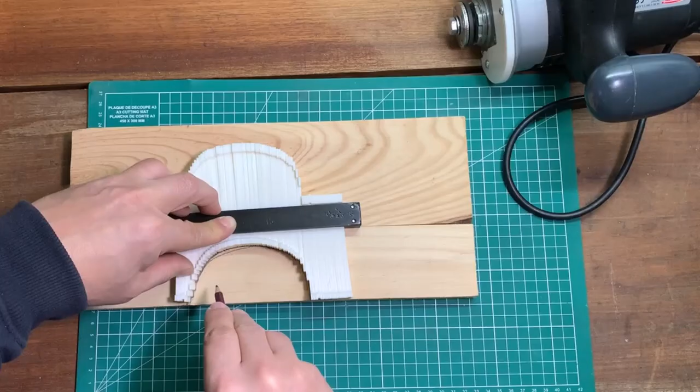Welcome to this second episode of our contour gauge creation with xDesign. In the first episode, we created the main parts of this contour gauge: two housing parts to hold blades, the blades themselves, and a clamping system to keep blades in position. Let's finish up this project by adding standard hardware, creating a knob, and making the assembly more colorful. If you haven't watched the first episode yet, I strongly recommend doing so before continuing.

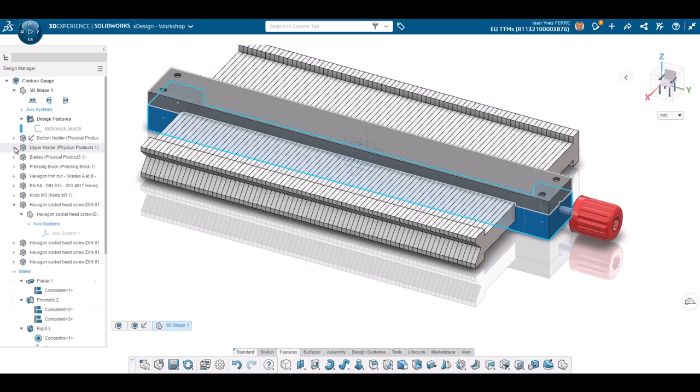I would like to use standard hardware, and for that I use 3D Experience Part Supply. This service is provided at no additional cost with any license of 3D Experience products. You can add a widget from the compass and get thousands of standard parts.

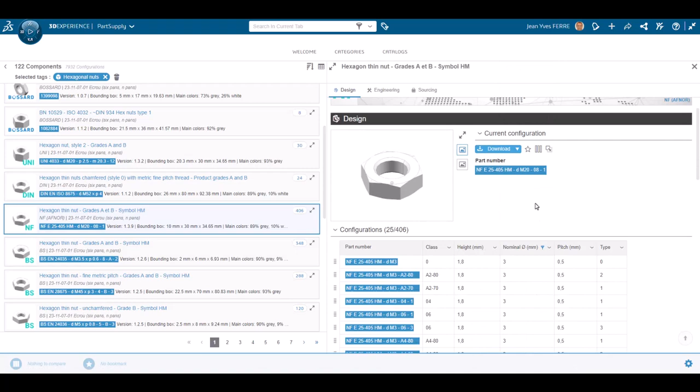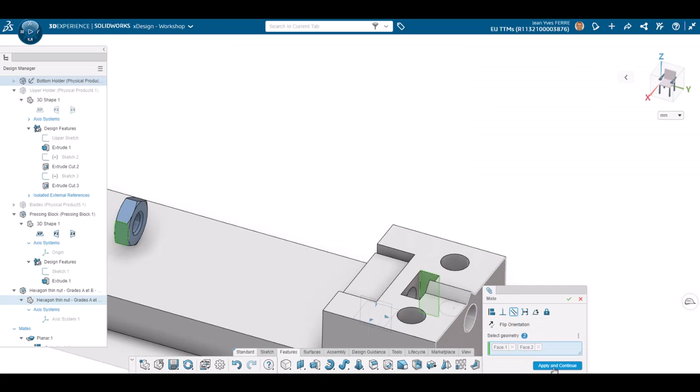For my project, I need a bolt and a nut. Let's start with the nut. Once I choose the type and dimensions, I can drag and drop 3D parts directly into my assembly. Very convenient. Of course, this is exactly like a part I built, so I can add mates and position it accurately. See how I solved the mating error with a parallel mate instead of a coincident one. Last positioning is made with a simple face-to-face mate.

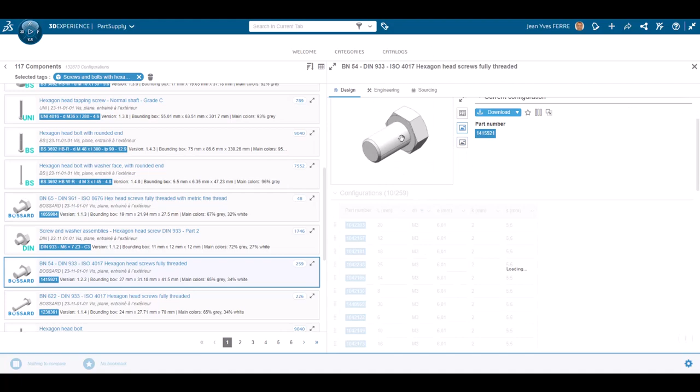Let's do that also for the bolt. I go back in the Part Supply widget. I choose bolts, category, dimension, and once the part is the right one, don't forget to click on the configuration. I can drag and drop it in my assembly. Don't forget to click insert, or you will open the bolt in its own window and close your assembly.

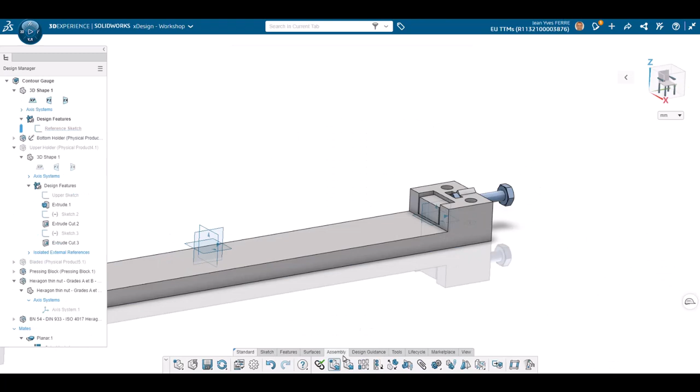Of course, you can also add mates to the bolt. They are both in place now. I will create a knob on the bolt head so I don't need a tool to clamp the blades.

To do that, I create a new component in my assembly with a simple click and start on the inside face of the bolt head. I will create some geometry around the bolt head and make sure there is no clearance so the knob stays in place. I project the bolt head and create a cylinder around it.

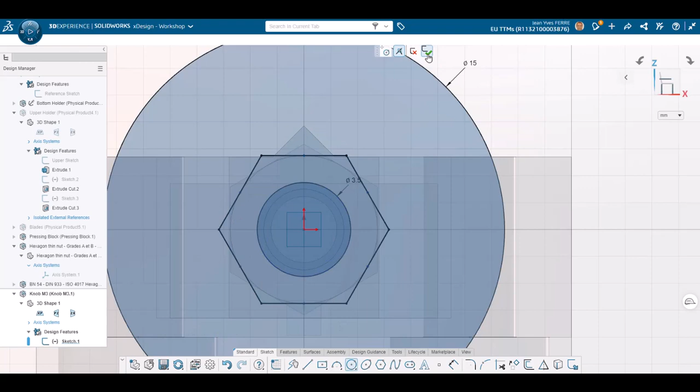I clean up the sketch to its selection and use this sketch for two extrusions. In one direction I add all contours for the bolt thread, and in the other direction only the outside contour for the bolt head. Don't forget the hole contour in the middle, or you will get a blind hole and won't be able to insert the bolt. You see that just selecting contours quickly gives the result you need.

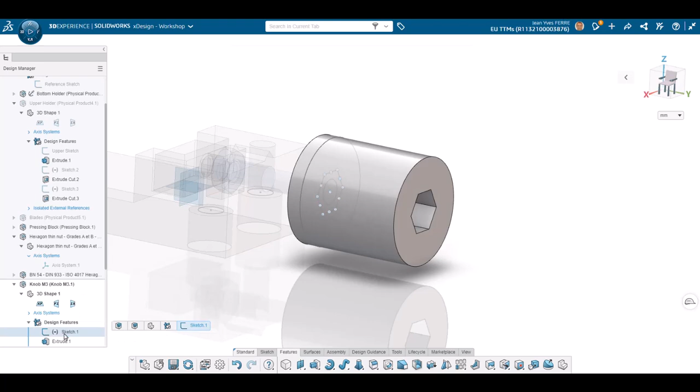I hide the sketch for more clarity. I would like to add grooves on the knob to increase grip when I clamp the blades, because I may need to put some effort there.

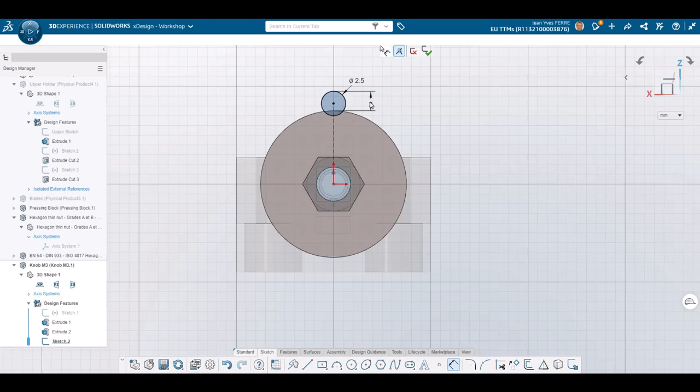To do that, I cut the knob head with a small cylinder using a cut extrude feature that will stop before the end, for style.

And I add fillets to remove sharp edges. I use the preview to guess the fillet dimension.

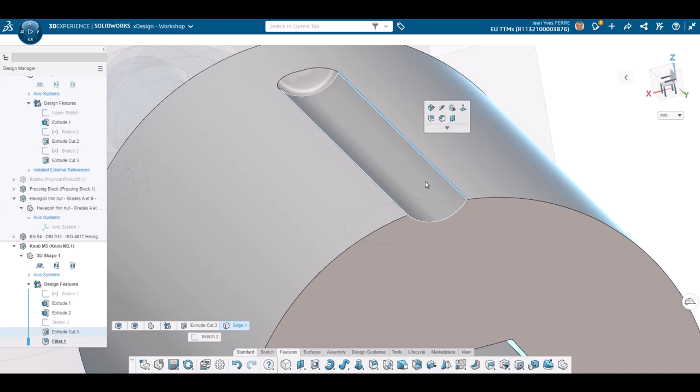Then I create a pattern with even distribution of the cut, and I also add fillets to this pattern. I just say I want to make the circular pattern 360 degrees, and xDesign shows how they are distributed. I increase the number so it looks nice.

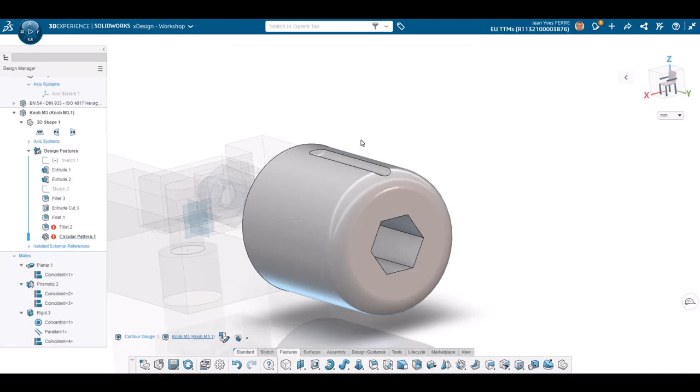I would like to round outside edges with a big fillet, but for that I go back in part history with this slider, so I can put the large fillet before the grooves. Doing so, there is an error because the edge I added for the fillet has disappeared. I just reassign the edge and it works fine.

I like to change the knob color, so I select color on the geometrical set. This is where you can change colors easily, and now the knob is red.

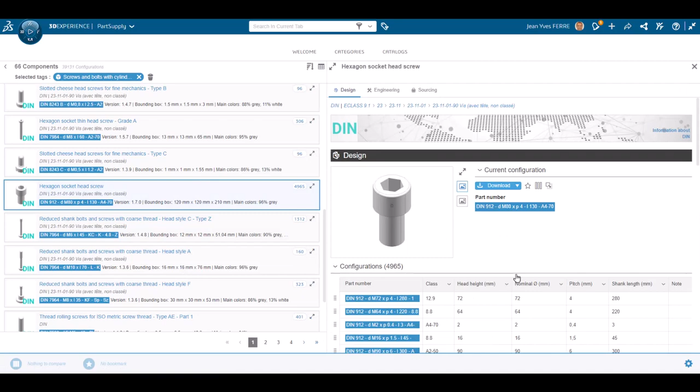To finish the assembly, I need bolts to keep the housing parts in place, so I go back in the Part Supply widget to find M3 bolts with the standard length that fits in my assembly. Again, I select category, drill down to M3 screw with hexagon socket head, and choose a length. I activate the configuration, don't forget, and I drag and drop it in my assembly.

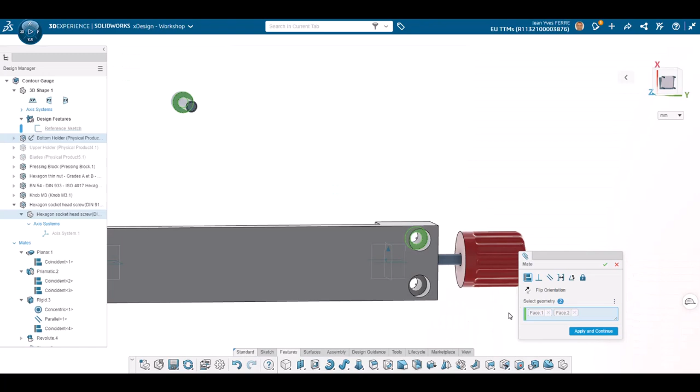Again, don't forget to click on insert, not on open. Mating is fun too. I select entities and choose directions. See how the bolt turns to match the right orientation. I finish with a concentric mate.

I copy the bolt, holding the Ctrl key while dragging the component I want to copy with the left mouse button, and I do that three times. Then I add concentric and coincident mates to position the last three bolts.

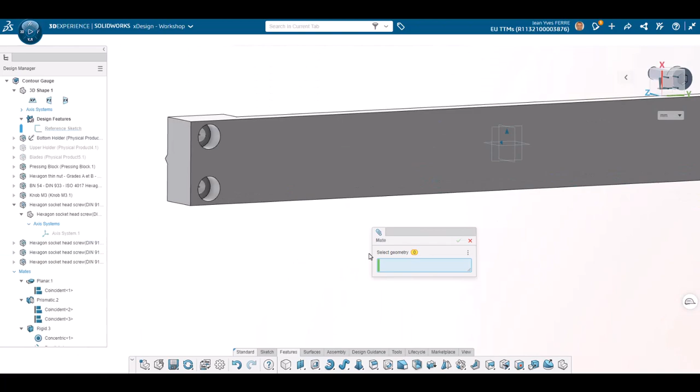Bolts are now mated in my assembly, so I show all the parts. I change the housing color to black, remember, with the geometrical set, whose default name is Design Features.

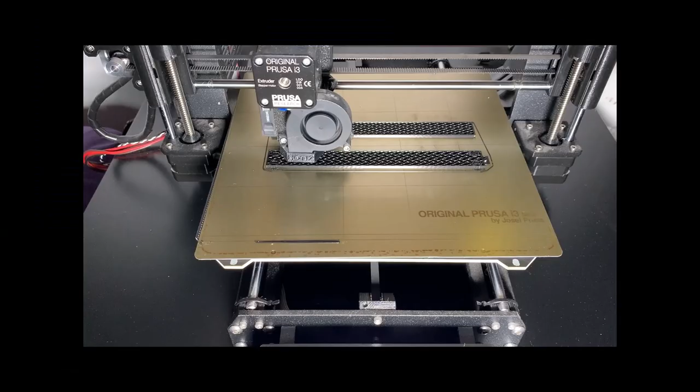Design is finished, now it is printing time. The longest printing sequence is for the blades. You need to print 75 blades, but you cannot print all of them at once. So please be patient, it's worth the wait.

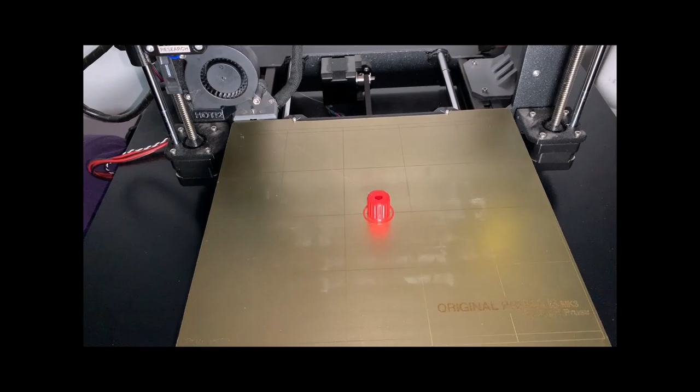For the knob, I prefer adding a drop of glue on the bolt head so it doesn't move with the knob, but the rest of the assembly sequence is rather straightforward. So you can soon enjoy copying complex contours and creating your own tailor-made parts.